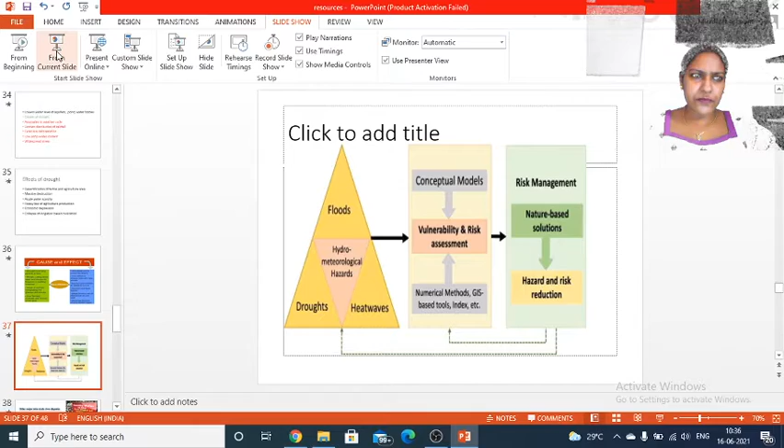We all know that in the last class we dealt with the different types of land degradation, and also we learned about flood and drought. All these are natural disasters and also man-made disasters that we dealt with.

So in today's class we are going to look at how we can overcome all these, or what remedial measures we should take as an individual. How do we analyze drought? There are many action plans that have been made. A risk management system and disaster management system exist in order to analyze hazards and reduce risk. A risk reduction system is there to evaluate or check vulnerability.

Flood, drought, heat waves - all these are related and causing a lot of difficulties. There are a lot of modern technologies like GIS. GIS can be used as a basic tool to evaluate vulnerable areas from the geographical parameter.

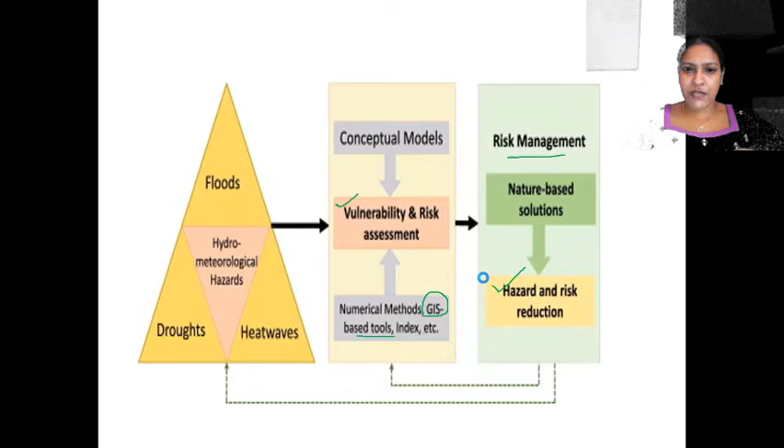Now we are going to learn about water disputes. Hope all of you know that the Cauvery Water Dispute Tribunal was there in 1990. These are the major interstate river disputes.

Here you can see the Godavari Water Dispute Tribunal, this is the area, the Godavari River. Then the Krishna Water Dispute Tribunal in Maharashtra, Andhra Pradesh and Karnataka.

Then the Narmada Water Dispute Tribunal. What is the Narmada River? The Narmada River is shared by Madhya Pradesh, Gujarat, Maharashtra and Rajasthan.

And the Ravi river dispute, which was held in 1986, during the 80s. The states fighting are Punjab, Haryana and Rajasthan. These people are fighting over this river.

for the utilization of the river. Now, as we talked about last time, the Cauvery River is also another issue being contested between Tamil Nadu and Kerala, along with the Periyar River. Hope you know about the Mullaperiyar Dam.

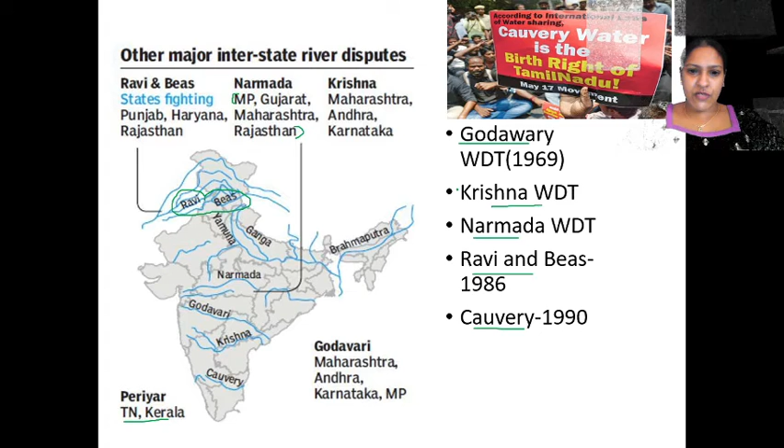So these are the different conflicts of water dispute tribunals. Remember that term, water dispute tribunal. These are the examples from India.

But what about at the international level? This is the international level. You can see a lot of disputes, like the Jordan River, where Israel, Lebanon and Jordan are fighting. The Senegal River, involving Senegal itself, Mauritania and Mali - everybody is going for this kind of Senegal River dispute.

The Nile River is a famous one, with Egypt, Sudan and Ethiopia countering for it. The Indus River - India and Pakistan have been utilizing it for their well-being. So there are a lot of international level disputes and also national level disputes.

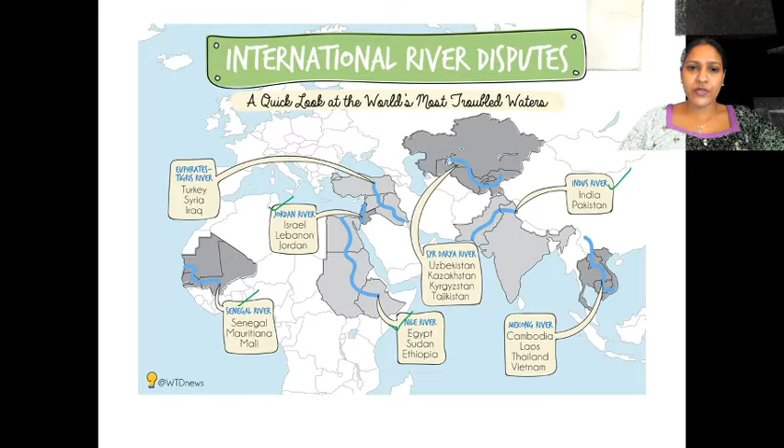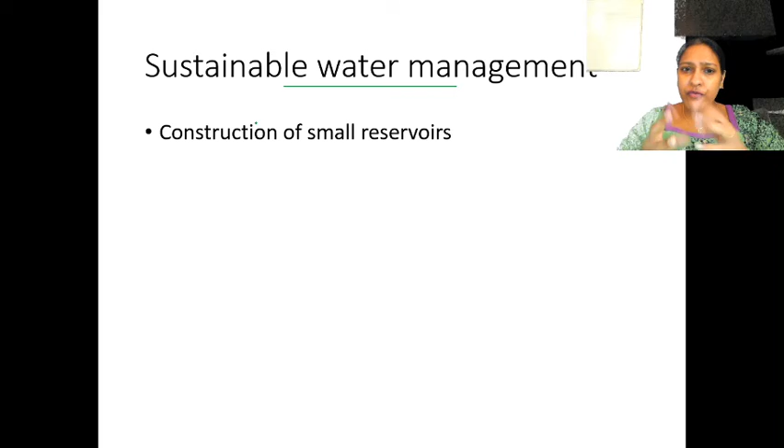Next topic we are going to deal with is sustainable water management - how you can use water management, or how you can use water in a very good manner. So instead of constructing big dams, why don't we go for small reservoirs in catchment areas, or small dams in the catchment area?

And also protection of wetlands - that is also an important task. And you have constructing bunds across the hilltops. You can construct bunds on the hilltop. That is also a very good way of a water management system.

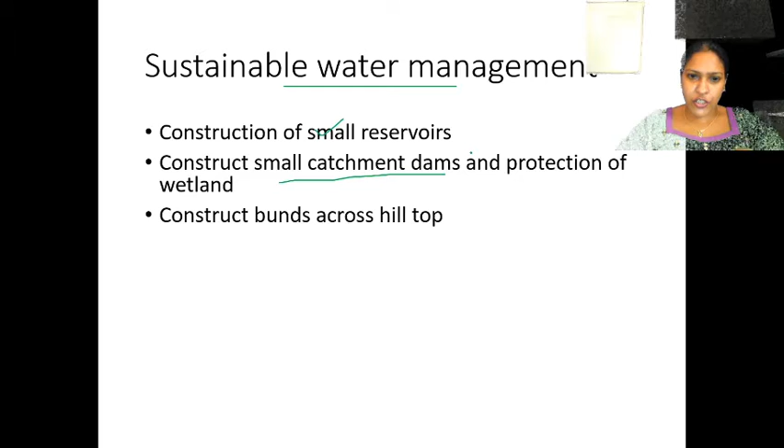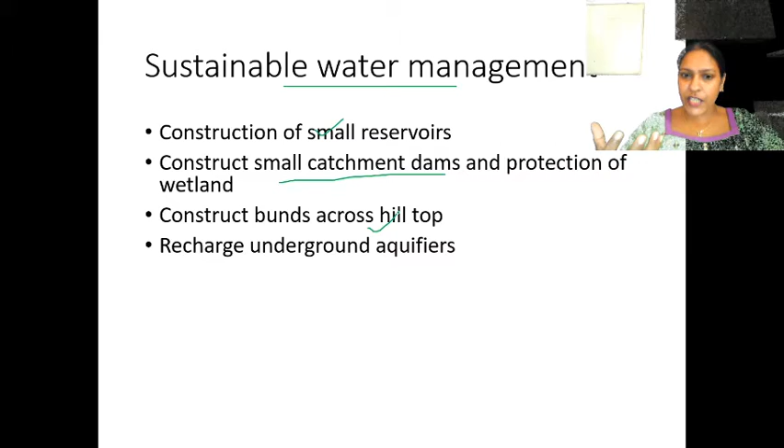Now you have recharging underground aquifers. So as you are retaining the surface water, you can recharge your aquifers. Hope you remember this term - it's the permeability of the rocks to retain the water in the underground. So if you are recharging your rocks, it will be very good for maintaining the water table.

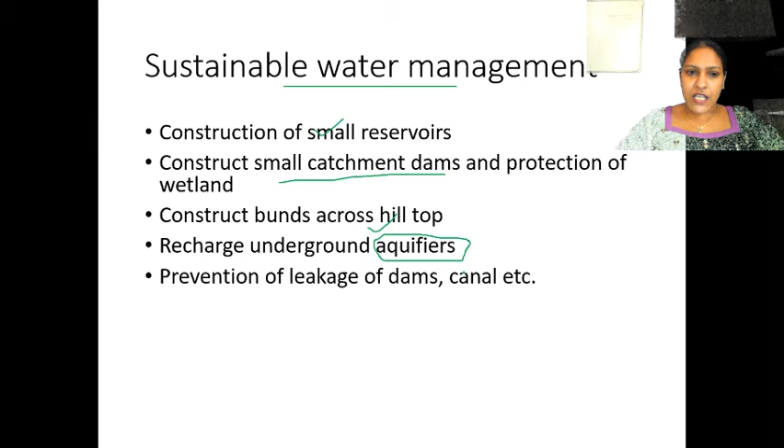So recharge it, and you should prevent wastage in the form of leakage from dams and canals. These are the sustainable water management measures that have to be taken.

And our favorite thing, the rainwater harvesting system, and drip irrigation. What is drip irrigation? In water scarcity regions, you can see that water is given in the form of drops to the plant root system - we are giving the water in the form of droplets.

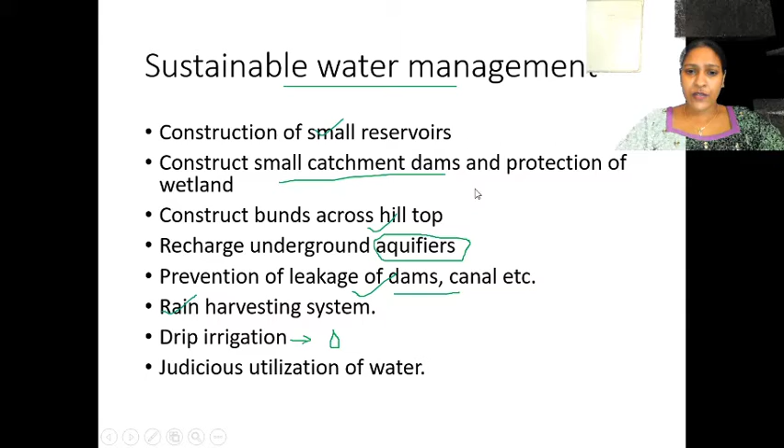So it's a conservation strategy. We have to use water in a very judicious manner. Don't go for any wastage. That is an important point. So don't go for any wastage - just remember that.

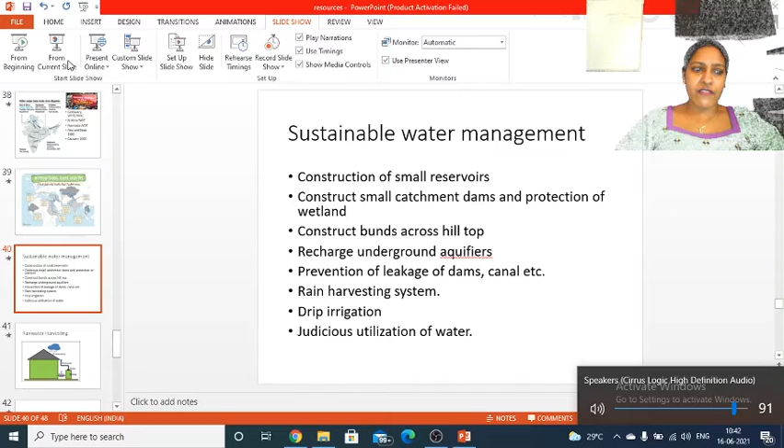So we were now talking about sustainable water management. Now we are going to deal with our rain harvesting system. What is rain harvesting? We have already dealt with all these points of sustainable water management. Now we are going to deal with the rain harvesting system.

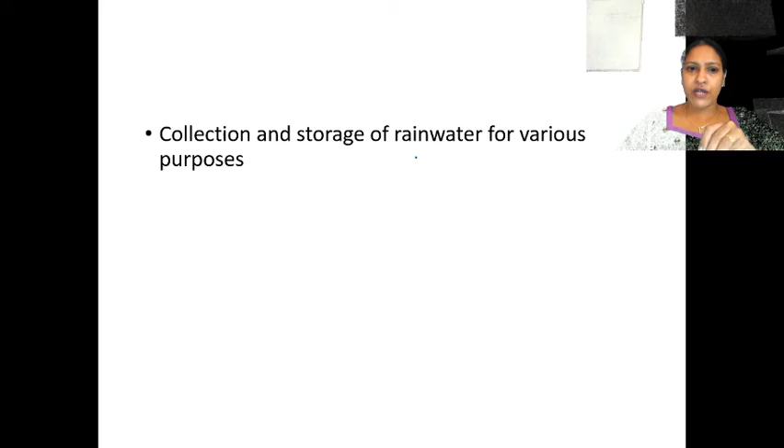So from rooftop, you are collecting it. Collection and storage of rainwater is for various purposes. It can reduce the runoff loss. How much water is being lost? Surface water is being run towards the paddy field, and the groundwater gets recharged.

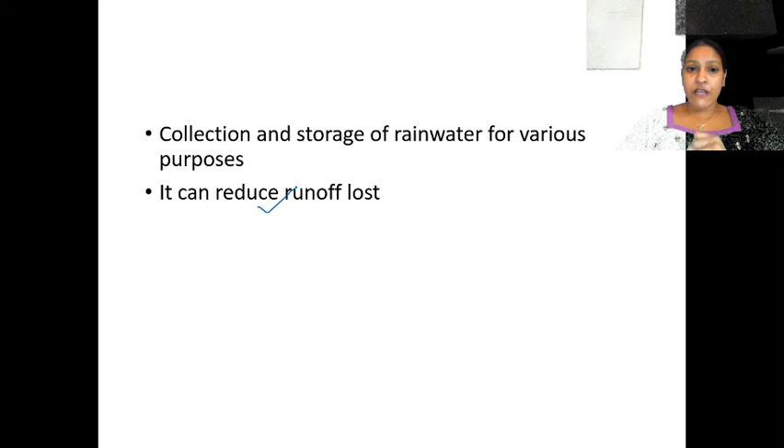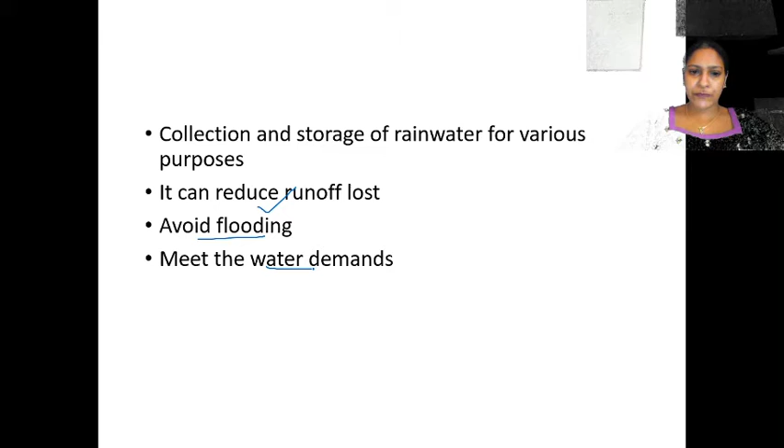Flooding can be avoided if you store this rainwater at your catchment area. That is an important point. So it can meet the water demands. All your demands for water can be met using this stored rainwater. You can avoid water contamination and also recharge our groundwater. That is an important point.

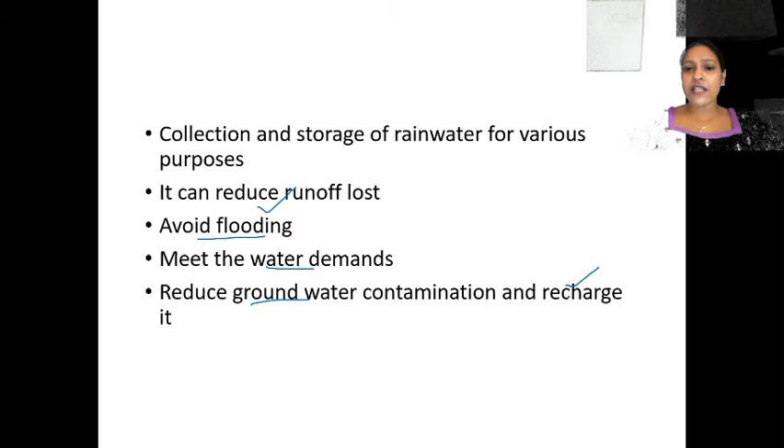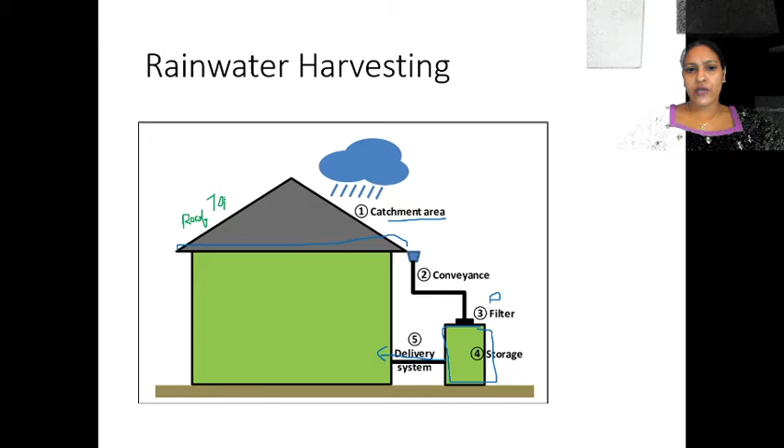So these are the different types of rainwater harvesting system. First we have the rooftop method, which we have already discussed. From the rooftop, you are collecting the water and storing it in a container and using it. This is a simple method, and you can collect everything with it.

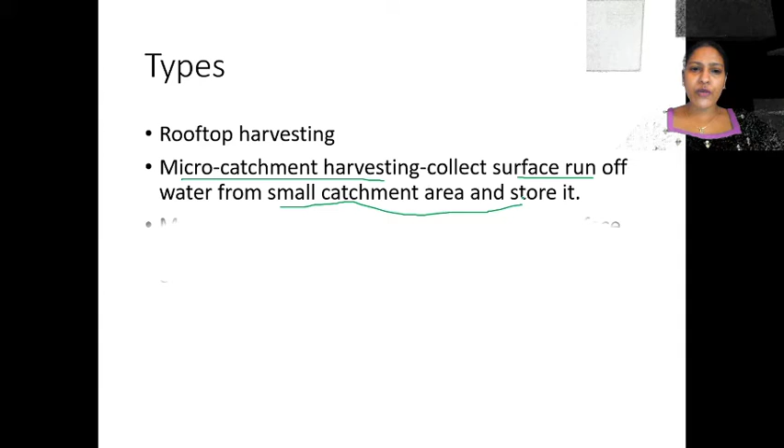Now we are going to go with micro catchment harvesting. That means the surface runoff water is collected from your area and stored. From a micro catchment, from your land, you are going to collect it and harvest it. And what about macro? Macro means you are considering the hill slopes. Micro means you are just collecting from your minor agricultural land area.

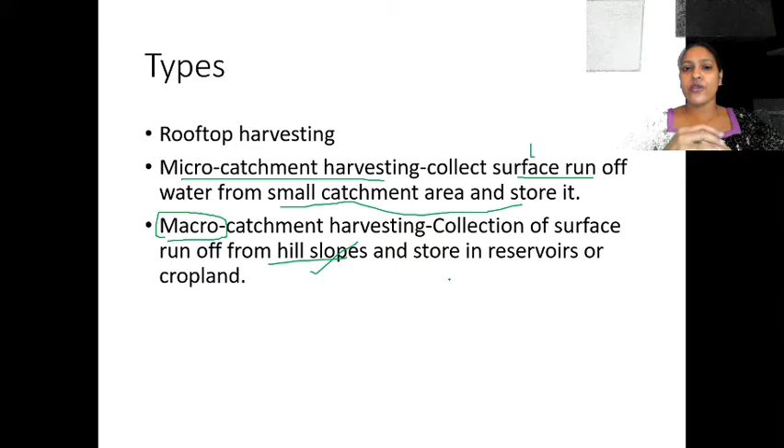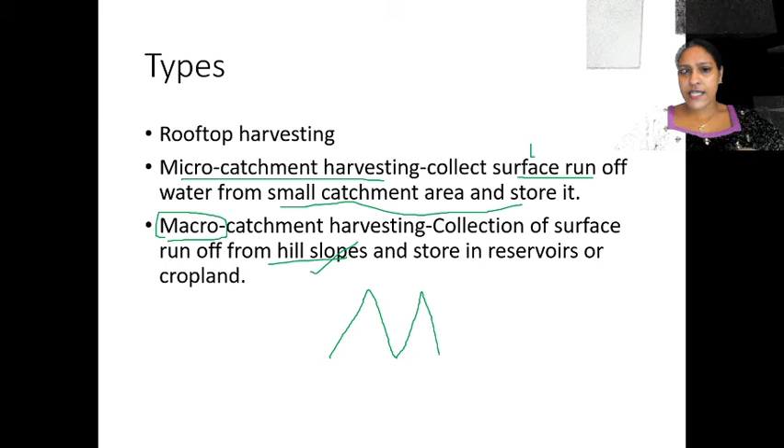Rainwater is very essential for accumulation and deposit in your area. There are different types of rainwater harvesting. Rooftop harvesting is the one we have dealt with, and also macro and micro harvesting. Macro means you are considering the hill slopes, from where you are collecting and storing it. Micro means from a small agriculture field or small area, you are going to take away the surface runoff water and store it.

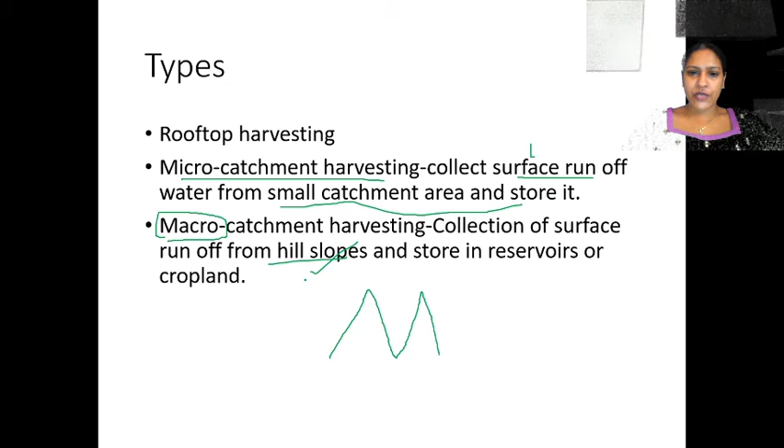So these are some of the guidelines. Now, watershed management - what is watershed management? So the rainwater system is over now, and different types of rainwater harvesting are over now. Now we are going to deal with what is a watershed.

Watershed means land area from where water drains to a common reservoir. From a land area, the water is being drained off and collected to the reservoir or a drainage channel. Channel means a distributory. That is a main point. So it is a drainage basin of a river system. Drainage basin means storing the drained water.

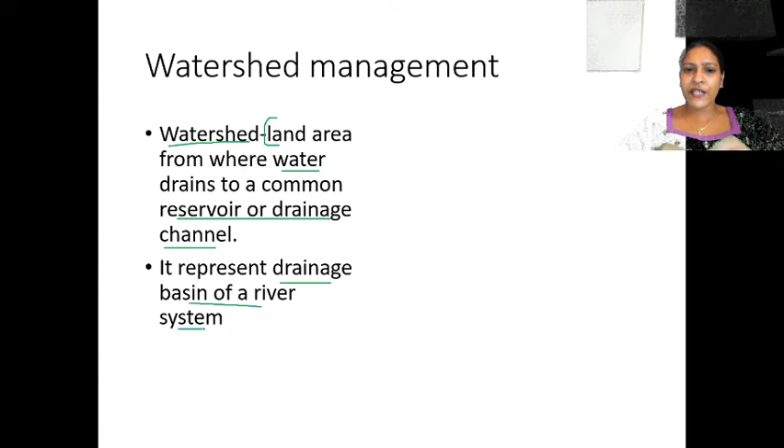From there, the water is drained out through the drainage area and collected into a bigger watershed, the larger watershed. From there it moves to the river stream. So remember the sequence: sub-watershed, larger watershed, and then river.

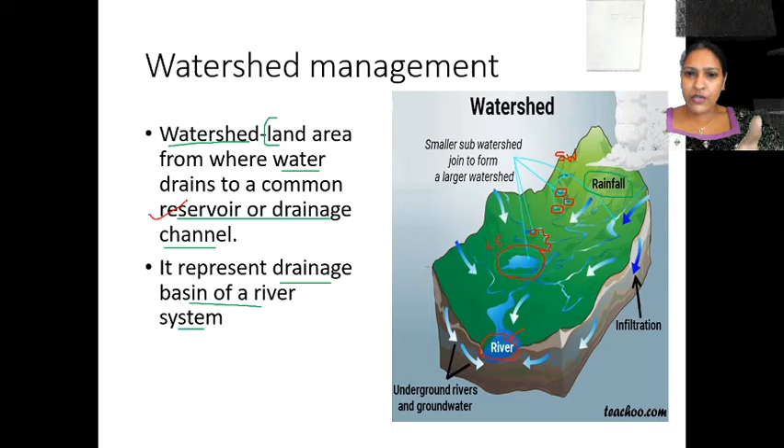So this is the drainage pattern. Watershed means the land area from where water is drained to a common reservoir, and that water comes from rainfall. Watershed is mainly important for sustainable food production, irrigation, power generation, growth of vegetation, and flood control.

It is very important to ensure a full-time, that is, perennial water supply. So if you store water in such a large watershed, you can get water for your whole life.

In India, the first watershed is being run by the Damodar Valley Corporation, which has an integrated water resource management system. This is the dam. Hope you all know where the location is.

Later, interventions by many people led to large reservoirs being proposed. In 1919, the idea of multiple reservoirs was also conceived, and three dams were used to overcome the flood.

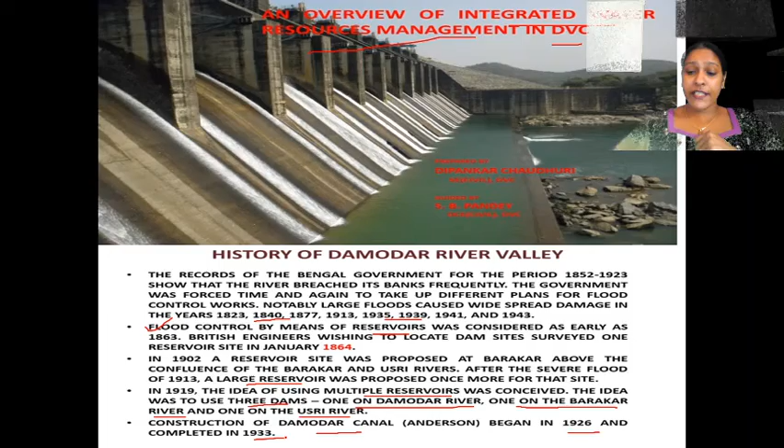So the construction of multiple reservoirs was done in order to control flooding. All these strategies were put forward. Now we move to the objectives of watershed management. The first point to remember is to control damaging runoff.

We aim for degradation control and to conserve our soil and water from degradation. While constructing a watershed, we need to minimize surface runoff, since it can cause a lot of damage like soil erosion and land degradation. This runoff water can instead be used for useful purposes.

So you need to protect, conserve, and improve your lands through watershed management, because the watershed reservoir can provide water for sustainable crop production. It can protect and enhance water resources originating in the watershed, storing water that can be utilized for agricultural fields, domestic activities, and everything else.

With proper watershed management you can check soil erosion and reduce sedimentation levels in both soil and water. Sedimentation is the deposition of silt particles in water. These are the integrated watershed management, or IWM, objectives.